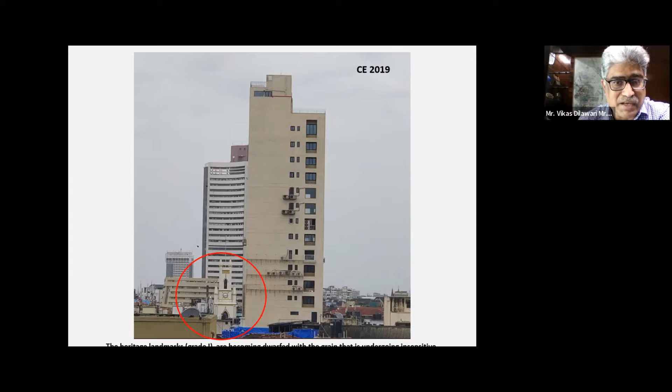Now, as we all know, Mumbai was the first city which started the heritage legislation, way back in 1992, and by '95 we had a heritage legislation. But a lot of things have changed, and you can see the skylines are also changing. What we find slightly annoying and disturbing, from a pure conservation point of view, is that grade 1 landmarks are being dwarfed by other normal buildings. Now, these are not public buildings; these are the grains which are becoming the landmarks. You can see one kind of an example, which is already there in the skyline of Fort.

And with the new DCPR rules coming in, there is an encouragement to such kind of redevelopment. And this is where conservation becomes more important and essential.

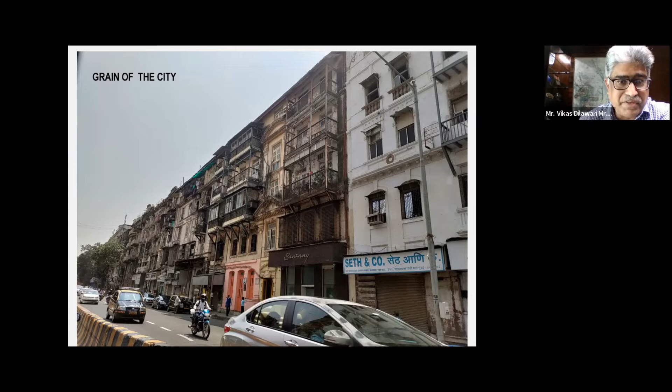Now, this is what constitutes a city, the grain of the city, and something which is not protected, which is not listed. And the only thing which is saving it is that the FSI consumed by them is more than what would be permissible. So the very fact that people keep repairing these buildings, and we still see the urban design.

As you can see, this is a photograph from Princess Street, where all the buildings are uniform in appearance, and which was a planned effort. And it's surviving very well. But unfortunately, changes have started happening. These will undergo redevelopment, and that's the concern.

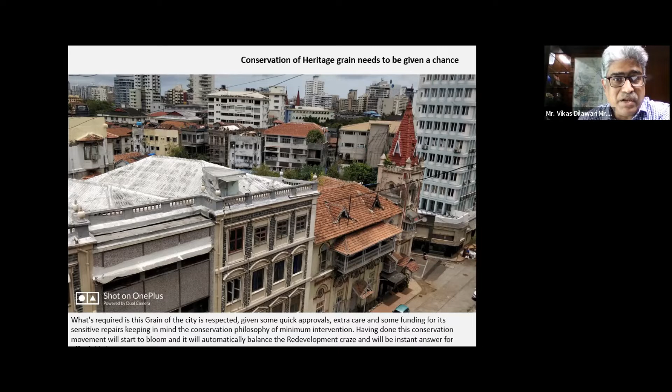Now, interestingly, this statistic is very interesting, that initially when the list was there, we had about 41 grade 1 buildings, but unfortunately these have reduced down to 10. We've added more heritage buildings and precincts, but we've also deleted some of them. The good news is we have 2 World Heritage Sites and a national park within the municipal limit.

But the unfortunate part is that these World Heritage Sites and their buffer zones, as approved by UNESCO, are not defined or marked in the new DCPR 2034. So that gives a chance and opportunity where these kinds of redevelopments can happen.

We had a review committee which has reviewed the list and has forwarded some of the revised listing of certain wards, but other wards are still pending.

Now, the thing which is of matter of concern is that the new DCPR 2034 allows grade 3 and precinct buildings to be demolished without the Heritage Committee's permission. And the new redevelopment can go as tall as 32 meters. Now, this is really the matter of concern.

And the sad part is that they have to go to the Heritage Committee only to document the heritage property which they want to pull down, which is very unfortunate.

So if you really see the percentage of the built stock which comes under heritage, it would be approximately 7.5%, as compared to London or New York, which is more than 25 to 35%. And this 7.5% constitutes real prime real estate, which is under threat.

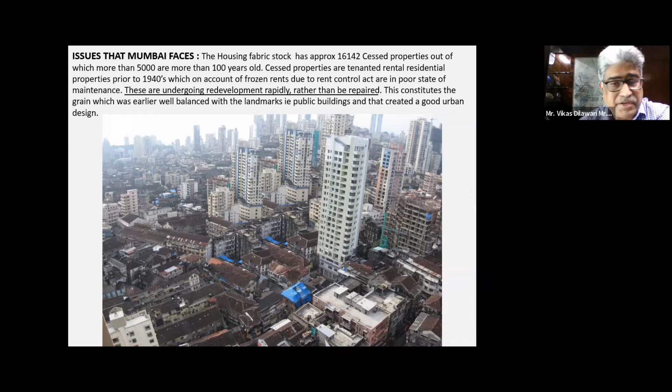Now, we are all aware that one of the major problems which we have is the Rent Control Act. And if you can see, the Rent Control Act doesn't allow the rent to be increased. So the landlord doesn't have any incentive or initiative to maintain it. Thereby, the buildings become weak and they get pulled down.

We have something called the cess board or the repair board. Now, the buildings which come under it are buildings prior to the 1940s. So if you assume the buildings to be from the 1940s, now they would be about 70 to 80 years old. And many of these are decaying and need some kind of intervention.

So if you can see, the earlier repair board used to replace the timber with timber, and later on the timber members became replaced with steel. But later on, in 1990s and '95, the whole building underwent reconstruction because, as I mentioned, the FSI they had consumed was more. But we started losing the architectural character.

But when we came down to 2000, the repair board started redoing redevelopment themselves, and they didn't find it to be very successful. So then the private builders started coming in, and you can see how the high rises and towers have started now.

So this is how slowly the grain gets eroded. What was the building height now becomes the podium, parking, and then the building goes taller than that. Having said this, the roads and the infrastructure have not really been looked into, which is a matter of concern.

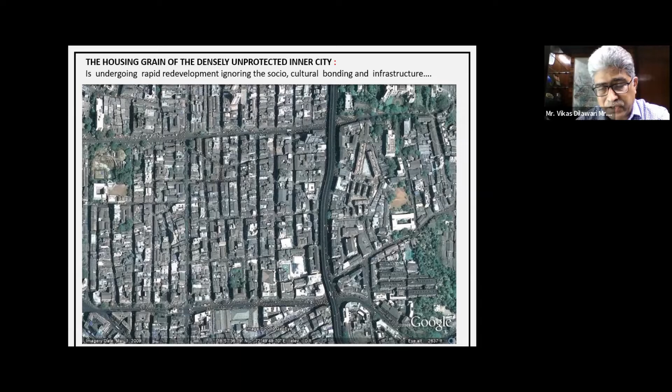This is a photograph of a normal grain. You can see the Muhammad Ali Road flyover, and this is the grain of Byculla. And you can see how these streets go from top to bottom, which is north to south, which forms the bazaar, and how this is now getting altered.

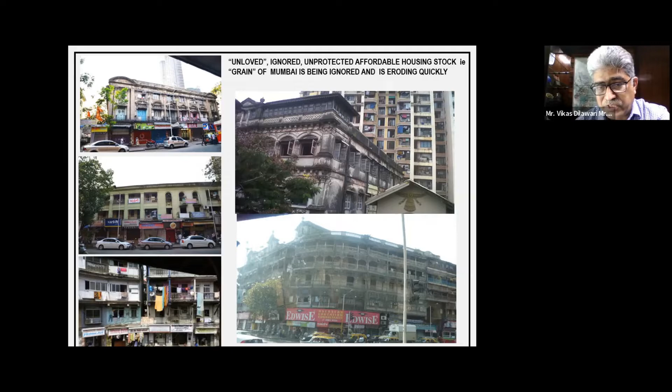You can see how the character gets, you have something which was an integral part of the character, which has now got lost. Now, it's a common fact that if you don't have good rents, the building is not going to be maintained. So there's negligence, no periodical maintenance, and increase in deterioration.

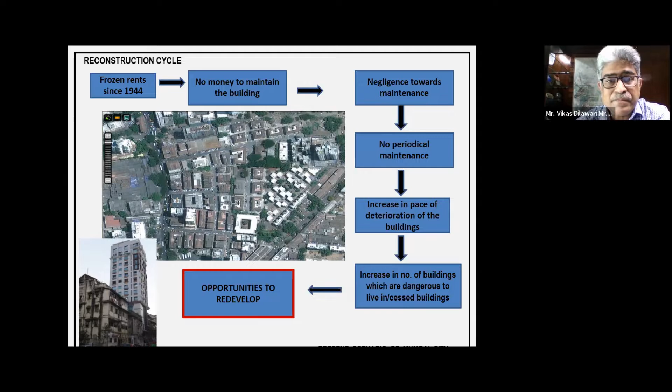Every monsoon we keep hearing a list of 200, 300 buildings coming out, which becomes unsafe. So everyone then jumps on for redeveloping it, but conservation is never given a chance or an opportunity. And that's where the conservationists have a request to the government to give an encouragement to this.

Now, these are the things which are happening, that when the buildings are pulled down, this is the kind of scale which you come on the left. What you can see is what the existing heritage building would have been. So what people try to do is they try to imitate that portion of heritage, and they construct a glass tower, which is not very justifiable because the two characters are totally different.

And these buildings keep going taller and taller. The one on the right was a chawl, which has been redeveloped opposite Bombay Central, and it's still going taller. You can still see the crane on the top.

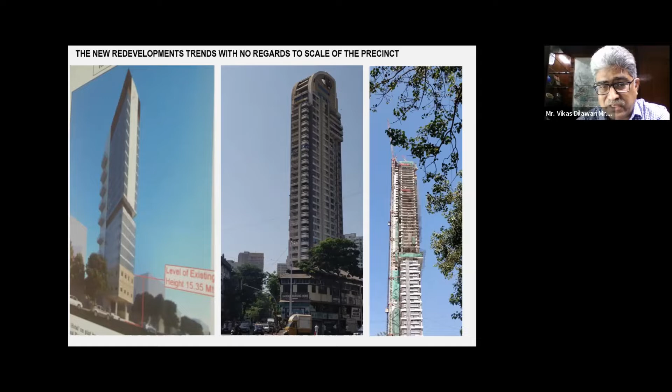Now, through some positive examples and case studies, we are trying to demonstrate how conservation can work, what are the challenges and what are the opportunities which these kind of projects give you. I start deliberately with a landmark building, and then slowly I'll go into the grain.

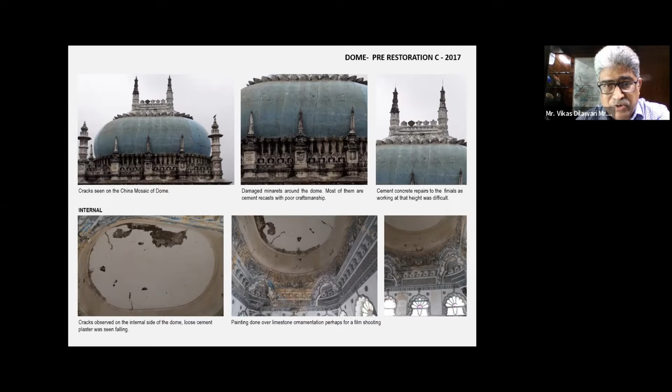This is the Mahajiani Dargah, which is from 1908. It's just about 100 years old. It was in a state of quite neglect, there were a lot of concrete additions on the minarets. The dome was leaking. You had cement concrete, which was used on the inside. The window panes were broken. And this is the overall effect.

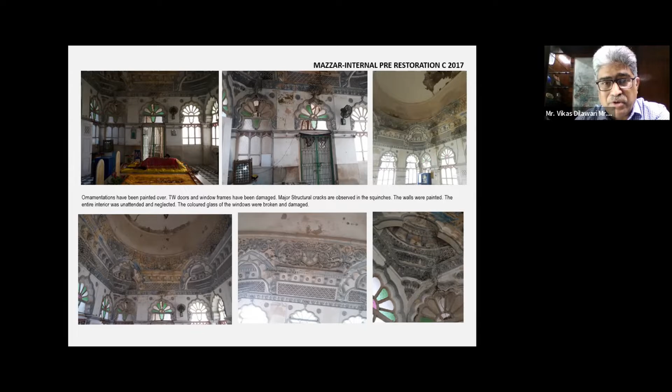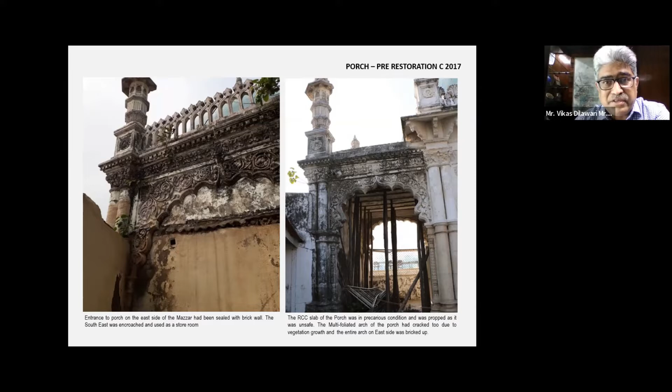Sometimes it was used for film shoots, and people painted over the stone, and this is how it looked. The broken glasses, besides the sea, they covered and protected with the help of a chadar, which was given for this. It was not a permanent solution to make it watertight. It had become dilapidated, so they had propped up certain arches, they had bricked it up, there were ad hoc additions. So this is how our heritage properties are looked after.

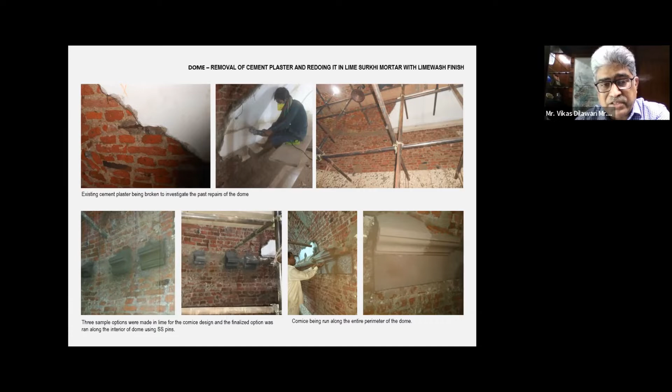But when the owners or the users decide to really conserve it, a lot of changes can happen, which is for good. And this is the first thing we started, to attend to the dome, externally and internally, and we discovered that there was a lot of cement plaster which was done. Some of the cornices were missing. So following it from a true conservation point of view, we restored it back in lime plaster, and brought the cornices back, which are the integral features of this interior space.

We had a major challenge that the stones had painted layers and layers. Now, it's not easy to remove the paint from the stone. If you scrape it, we tend to damage it because it's a soft Porbandar stone. We were fortunate that we were working on Flora Fountain, where steam was used by the conservators, and there were a lot of contractors who were trained in this process. So we reintroduced this technique of using steam.

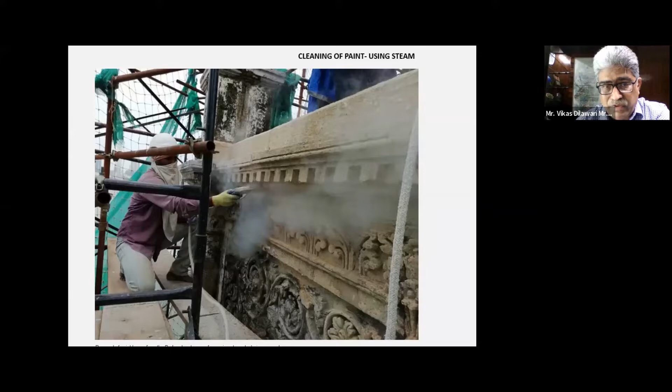Again, sometimes we are experimenting with conservation because we don't have this established. This is what we found, and what we found was to be least damaging to the stone. And very carefully this was done.

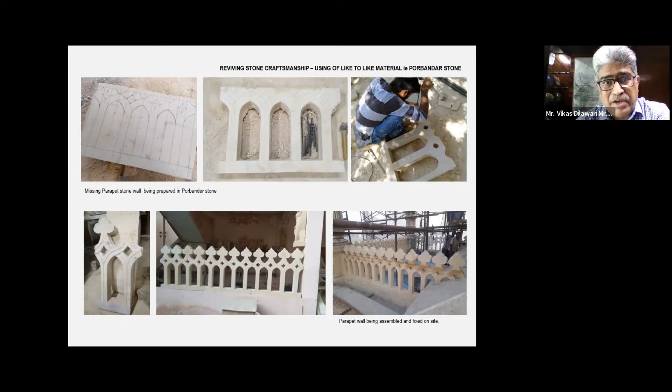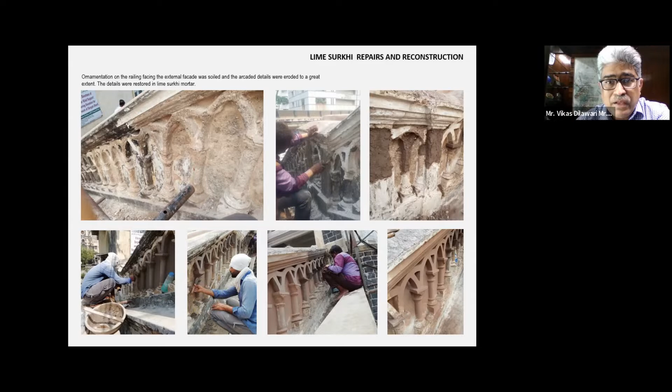Being close to the sea, the lime surkhi plaster which was there was eroded. We had to redo it, and it was done in lime surkhi again, using like-to-like materials. Similarly the woodwork, again, being a building so close to the coast, the wear and tear is fairly large. These were fixed windows which needed to be carved into these kind of special multifoil arches. So these were also revived.

And instead of using large embossed glass, we decided we'll go for some colored glass, and we tried to keep the glass plain so that when the sun sets and when the sun rises, the glass gives a different kind of effect, and it enhances the tranquility of the space inside. Having said this, as I said, I'll talk about the opportunities and the challenges of it.

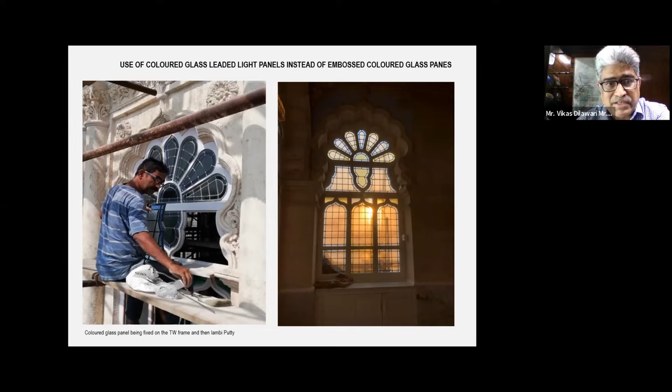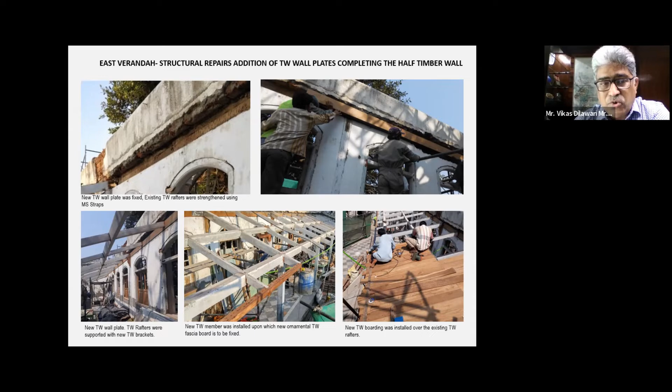We also had to structurally repair and strengthen the verandas. It's a very unique typology, not seen in Mumbai, where you have verandas and courtyards, and a very unique dome. Normally you see domes on a square, but this is an elongated dome on a rectangular plan, something like a submarine. This is the courtyard, and we had to restore its wall plates and structural system.

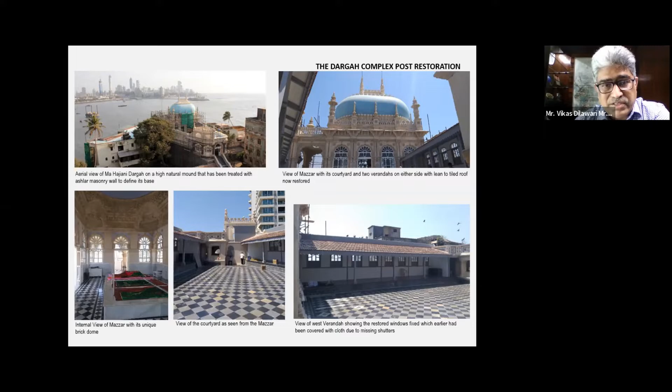You can see the entire thing when it is restored. So here, these were following the normal established conservation norms and making it functional.

But having said this, now comes the opportunities and challenges. This is a very recent photograph, and you can see some moss and algae which has come. So the question is, when you clean the paint, what do you do next? Because the users feel more comfortable painting it, but from a conservation point of view, you've decided to remove the paint and leave it like that.

Use of chemicals is again a subject of debate. Some people advocate the use of chemicals. I had applied it, but it didn't last so long. So the question is whether one should use chemicals or do periodic maintenance instead. These are some of the issues cropping up, and they need to be addressed.

It was a grade 1 building, but it was lowered to grade 2. It was neglected, and I'm sure if a review is done of the grading after it's restored, people would like to raise the grade higher, perhaps.

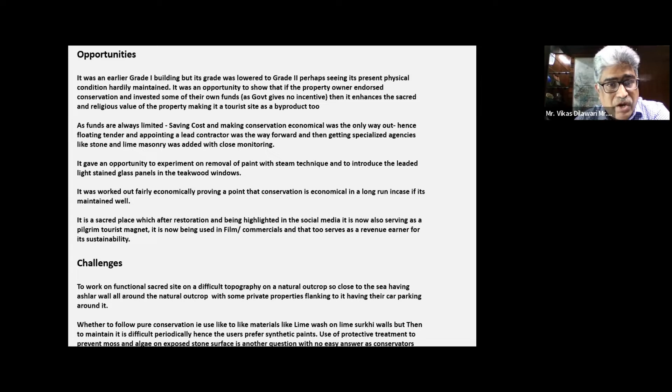As funds were limited, we had to work in the most economical manner. The difficulty was that we were working on a site which was on an outcrop. Erecting scaffolding was not easy, and the wind and rains were real challenges, because they are phenomenally strong there. We had to ensure that what we were doing was maintenance-free and would last as long as possible.

One good thing that has happened is that once this place has been restored, a lot of people have started visiting it, and it's helping pilgrim tourism, which is very important, and it's a byproduct of conservation. So these were some of the things that were there.

There's another very interesting building, personally one of my finest in Mumbai, which is Hirabag, again from 1905. All these buildings are about a century old. It was designed so that the shops would subsidize the activity of a dharamsala on the top floor. But unfortunately, with rent control, the building started getting neglected and decayed.

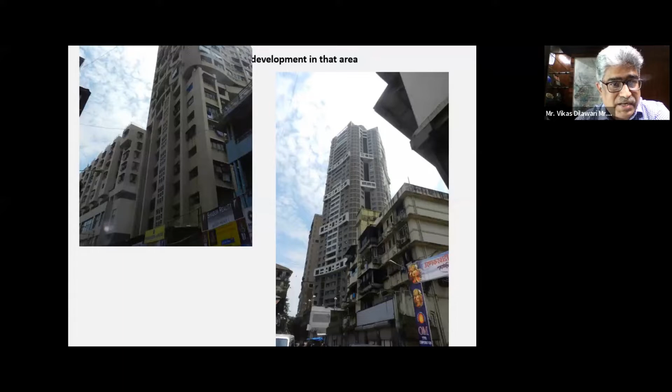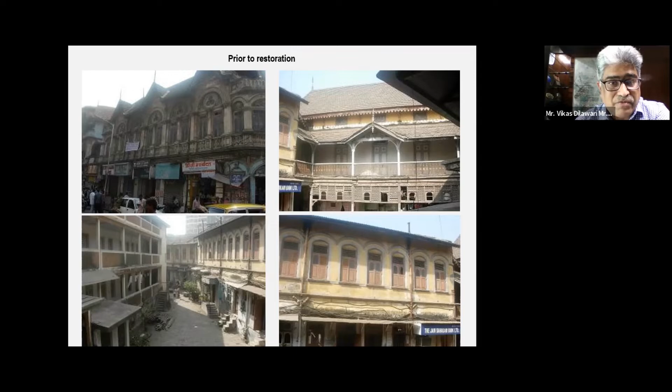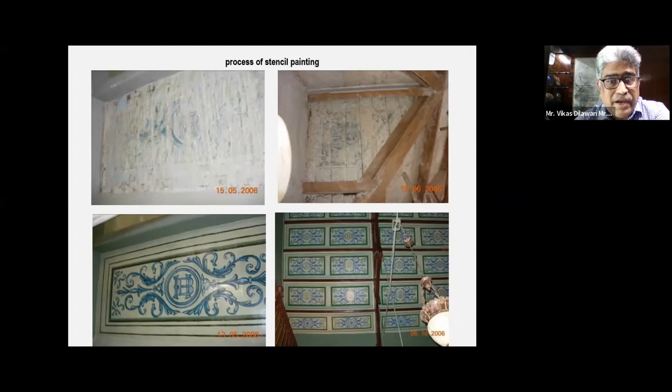While we were working on the building and trying to refurbish it, we started discovering very ornate details of stencils, something unexpected from the normal grain of the city. This is where we could help in restoring it back, and what it has done is magical.

It has now become an air conditioned space because you can't keep the windows open, the honking and noise level outside in CP Tank Bhuleshwar is very large. So the windows remain shut, and we had to air condition it. Now these halls are being used for various activities, and it started generating funds, which helps in subsidizing the dharamsalas, the basic function of this building.

So conservation can work as a tool. And of course, this was a listed grade 2 building. I started with the earlier building, which was grade 1. This is grade 2, and slowly I'll be going down to grade 3 and precinct buildings.

This is how the spaces inside look after we did one building — the clients themselves did the other building, which was very good and encouraging, that they picked up the essence of conservation and used it further. This is an example, because it is easy to pull down these kinds of spaces and go for buildings like what you see in the background, but these are the hidden jewels which bind the city and the area socially and cohesively.

So again, as I mentioned, it had to be economical. We had to see that it becomes sustainable.

And we revived a lot of lost art and craft, like gilding, stencil painting, lime arraish, lime plaster work.

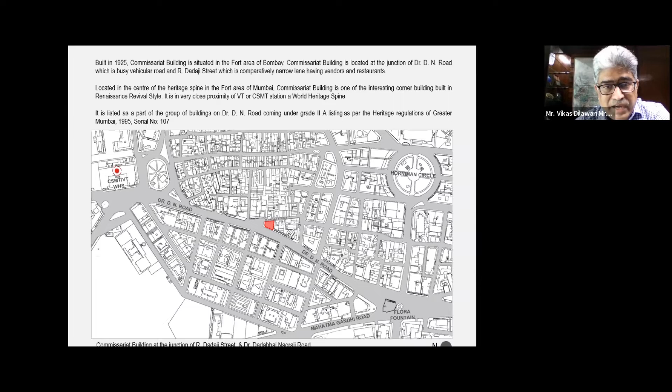DN Road is the most important road which we have. The buildings which are more significant are the ones on the western side, which came after the demolition of the fort walls. But what I'm referring to is the building shown in red, which is a 1925 building. So in 2 to 3 years time, it would be celebrating its centenary, and it has very fine urban design.

One of the buildings on DN Road has now been demolished, so we really hope nothing high rise comes in. There has been one building which has been redeveloped very sensitively in the same height and profile. Fingers crossed, but this forms a very important urban spine.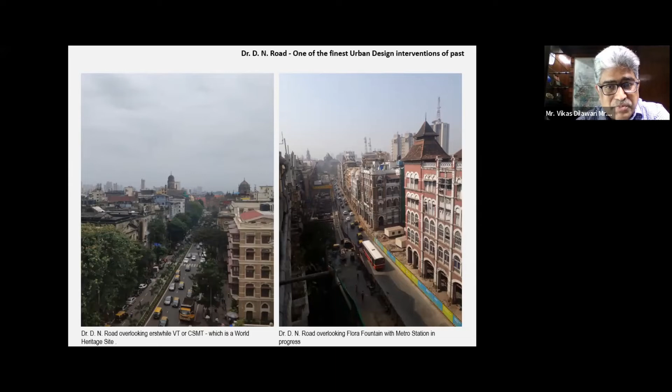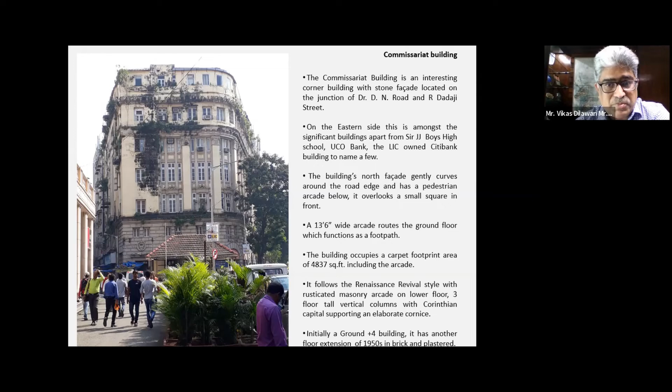This building was served a notice of being unsafe. You could have pulled it down and gone for redevelopment, but the clients, who were housed here when the building became unsafe, decided to shift out and restore this building to its original grandeur, and move back to this space. So this is how the building looked like.

It was originally a ground plus 4-story building, but post-independence, when the FSI was given higher, most of the buildings on Fort area and DN Road got an extra floor. That was integrated very sensitively without disturbing the overall ambience of the place and its urban design. So this is what it is.

And you have a metro station coming out. What you can see is the piling work happening for a station outlet.

This is how the building was neglected, and of course rent control comes into it. You had vegetation growths, areas which were inaccessible, pipes that never functioned, and on the ceiling a corrugated AC sheet roofing. You can see the beautiful two towers, VT and BMC, from behind.

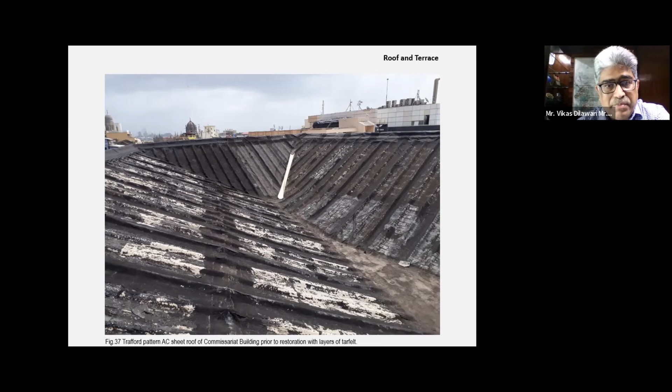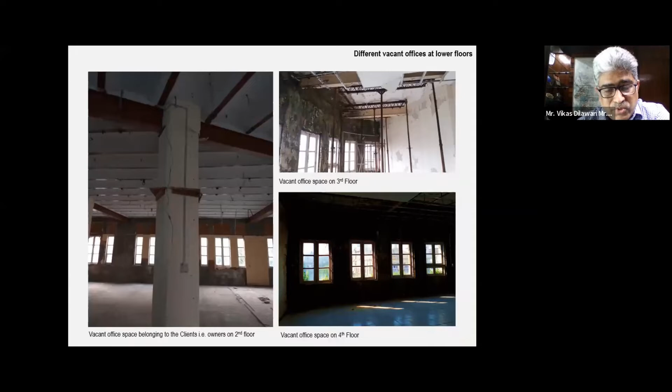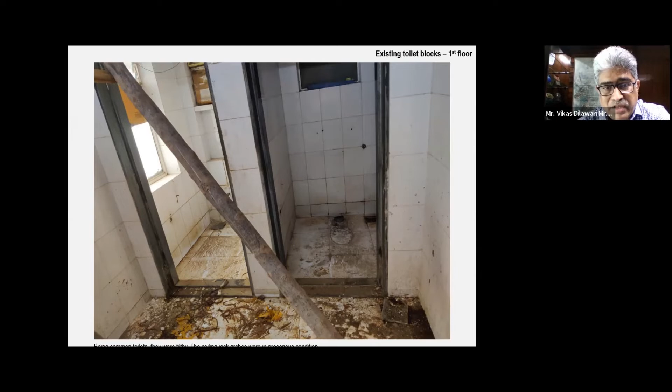When we opened the false ceiling, we discovered all the structural trusses to be completely unsafe. It had jack arches on the lower floor, which also were showing signs of distress in certain areas. It had some beautiful Minton tiles, but they were badly damaged. There was a wooden staircase, and toilets which were in complete mess, as happens with many of our buildings in Fort area, along with the electricals.

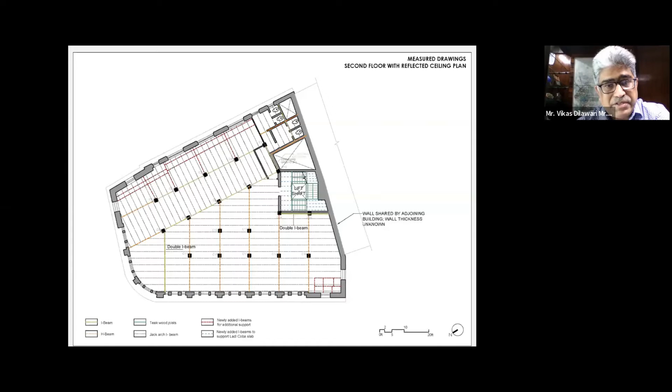So again, all these needed to be planned in a manner which was affordable, economical, and achievable. Good documentation of drawings was done. Permissions were applied to the Heritage Committee and then to the Municipal Corporation. The Heritage Committee permissions came very fast, but the Municipal Corporation's permission took very long, which becomes a deterrent — if you don't get good, quick permissions, a lot of people get stuck with repairs.

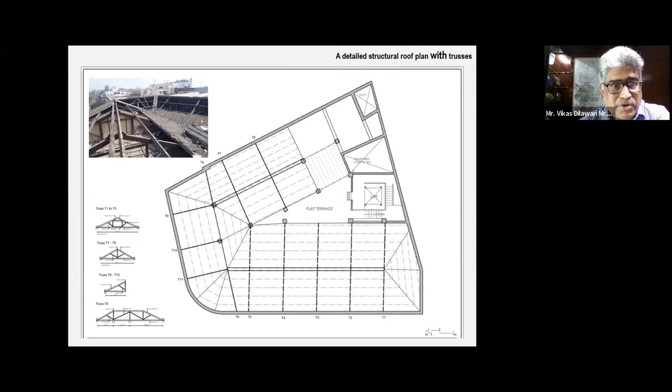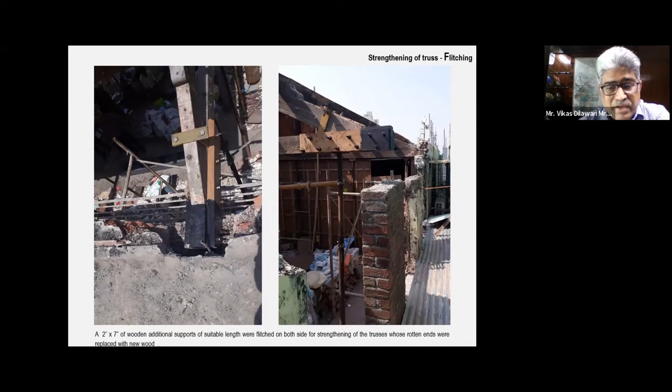This is how the process went — I'll be quick with it. The trusses were documented, the corrugated AC sheets were removed, the trusses were analyzed, repaired, and strengthened. We realized that the walls on which they were resting, which was added as an extra floor after the 1950s, was not very safe, so we had to reconstruct those walls.

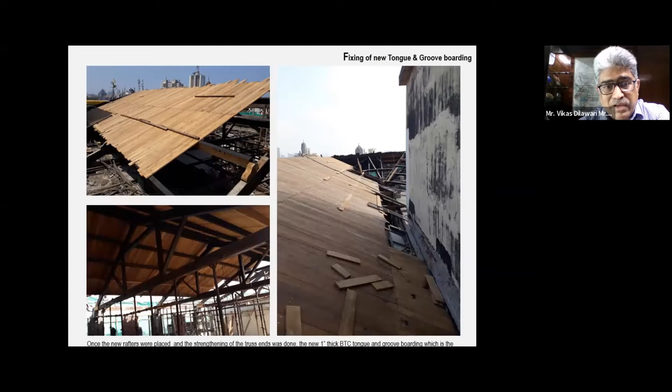The site, abutting DN Road, had roads on all sides, so there was hardly any space to keep material stacked or erect scaffolding comfortably. This is where the tiles have gone back, which blends with the character of the fort area. It also helps in thermal insulation, especially when planning to air condition. So we followed that kind of approach to go back to its original details.

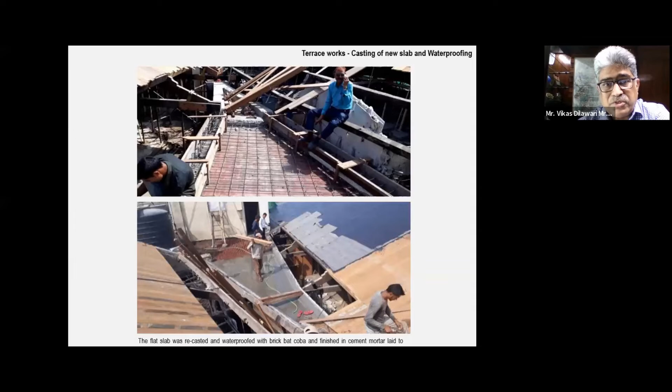These are works happening within the spaces inside, which was very tricky, as I said, because it was abutting the road. We had to introduce some new slabs, added with the help of a structural engineer. It was a great teamwork of everyone.

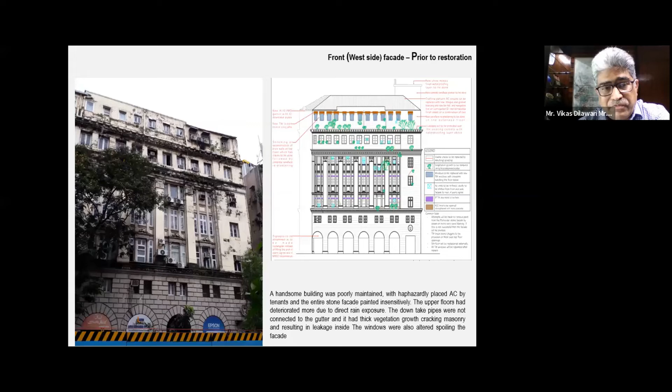The external facade was then taken up, because once you made the building watertight from the top, we started attacking the facades. The facades were facing the west side. They never had any chajjas over windows, so we gave small drip molds.

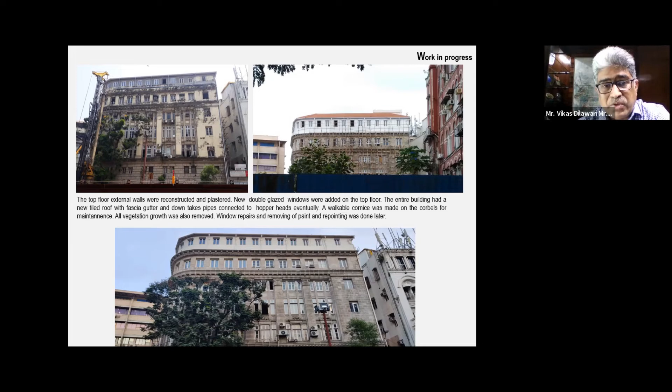The top floor, which was added later on, had internal gutters, but we shifted the gutters outside, collected the water in hopper heads and drained it off. And you can see the paint which was done on stones was removed.

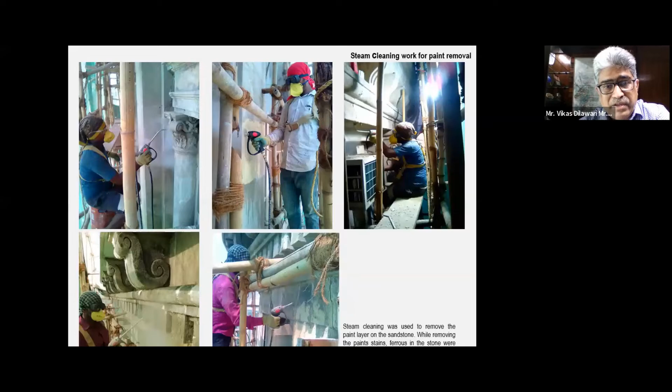This is the rear facade, and this was again documented. Again, use of steam to remove the paint in a manner which will not damage the stone. And this is how the rear facade was made.

Then we started working on floors, addressing the jack arches, because when water used to come in from the west side windows, the first two or three arches were very badly damaged. Not all the arches were damaged, but certain ones were. So again, using the conservation philosophy of minimum intervention, we did what was desirable and improved the technique.

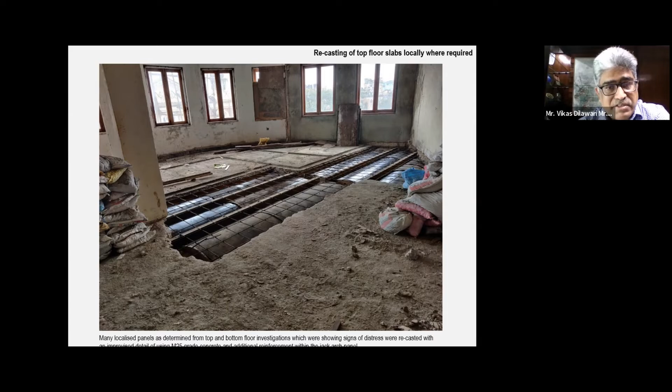A mesh of reinforcement has been added as an extra protection, and that binds it. The same technology of jack arches was continued, and in certain areas we put a mesh which binds the whole floor together, as advised by the structural engineer. Now you have a very large space available for adaptive reuse.

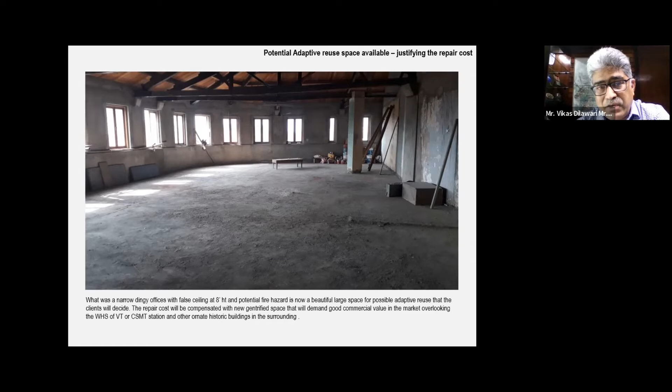Now, this is where the clients will move in, who are the owners of the building. So they have plowed the money back in to have the building restored, and that has enhanced the property value.

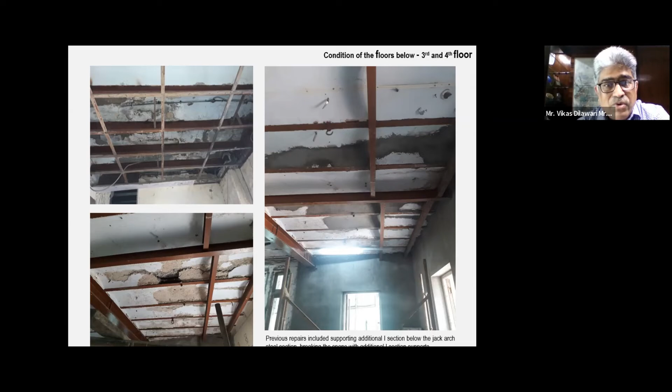Now, other work was done on the floors below. These are tenanted properties, and when you're working on such properties, the tenants don't shift. So people keep repairing it as best they can from inside—one steel joist, another—and then put up a false ceiling. This is how we got an opportunity to convince some of them to vacate their offices for a few months.

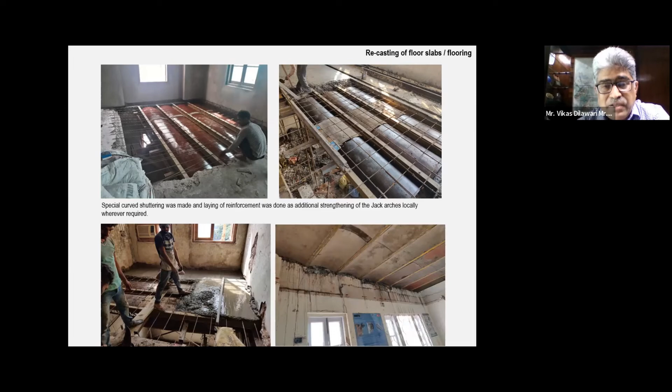We cast new slabs, and you can see the condition—it was highly precarious. Again, following the same conservation techniques of using like-to-like materials, we reintroduced jack arches and discouraged use of false ceilings, so that the structural system of the building is exposed.

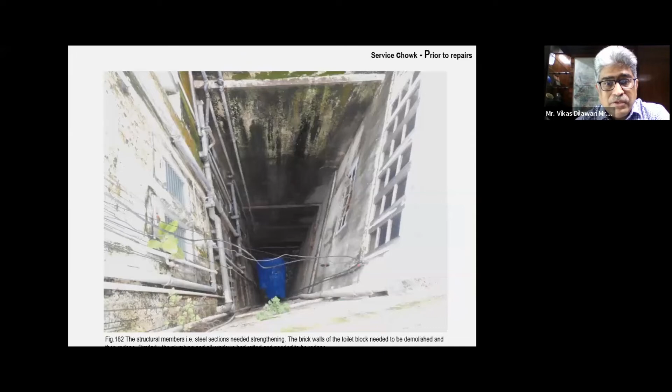So very quickly, this is just to show you a typical Fort area building, but once you treat it properly, it starts transforming and you increase its property value. The best thing is that the footprint remains the same, the people remain the same, and you're not loading the fragile infrastructure.

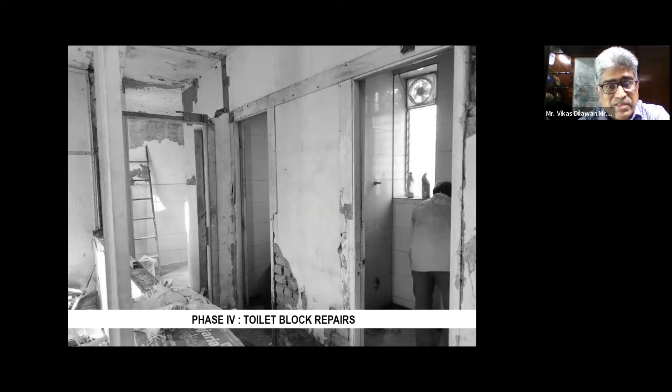The toilets were certainly the most precarious area. So we cast new slabs with sunk slabs for waterproofing details to happen.

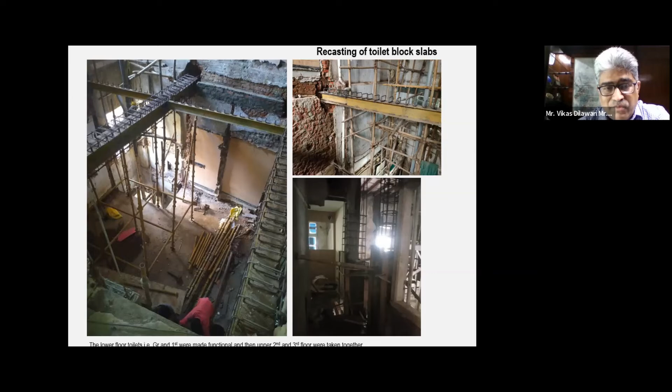And of course, COVID also happened at this same time, and the importance of good hygiene and other things was realized, which endorsed what we were doing.

Electrical forms a very important component, so all this needed to be planned in a very integral manner—one thing at one time. Of course, the lockdown gave an opportunity, because most of the offices were closed, so we could work on the electricals and redo them.

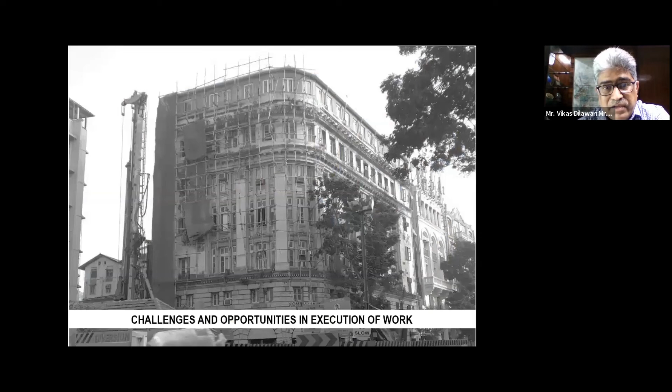Now, as I mentioned, there are many challenges, because when you're working on a very tight site where you can't unload material, where do you keep it? How do you work? These are a few things one has to learn in project management, how to handle it.

The other thing was that suddenly the metro started coming in, so where we used to unload a truck, that also stopped—they cordoned off that area too. For this, the permissions, as I mentioned, the municipal permissions take a long time, and it's online, and sometimes you have to wait for a very long time, which is really not very desirable.

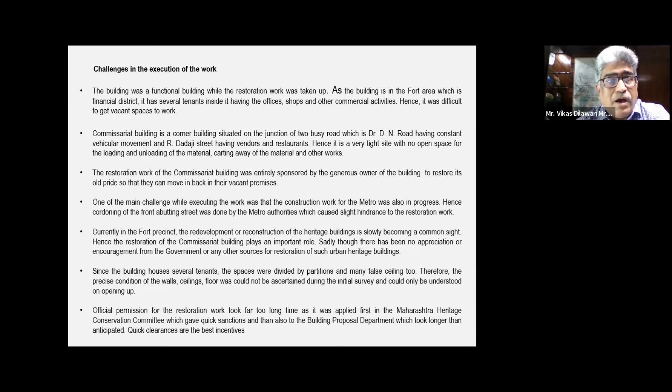The opportunities were several—you were given a free hand to do what you wanted, and with the cooperation of the tenants, who didn't contribute anything, we managed to do a lot of work. It was minimum intervention, using like-to-like material, and doing an economical repair so that other buildings can follow the same kind of path further.

The property now commands good property value. They have an entire second floor which is being leased out, and hopefully with the lease rent they should be able to maintain the building. So this is how conservation can be used to restore the grain.

And these grains don't need to then become landmarks, and the established pattern of our city, which was the finest city east of Suez, can be retained.

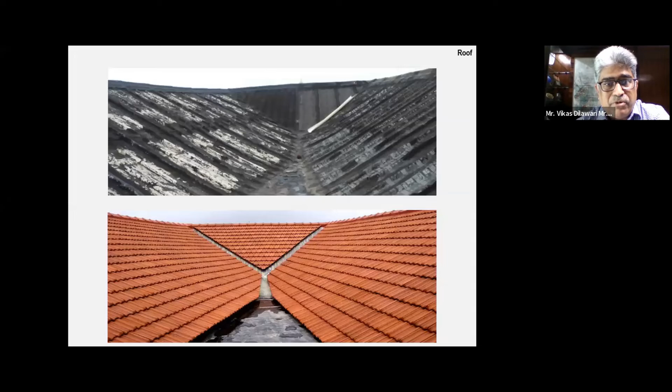So these are just very quick before-after photographs for you to see the difference it brings. Of course, it's a very slow, tedious process of 2 to 3 years. It can't happen overnight. A lot of personal attention and intervention is required. And this is the difference which it brings. This is the top floor, and this is the view you get from the top of the terrace now.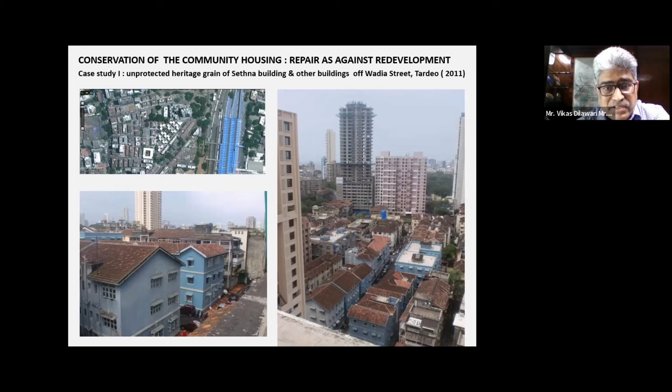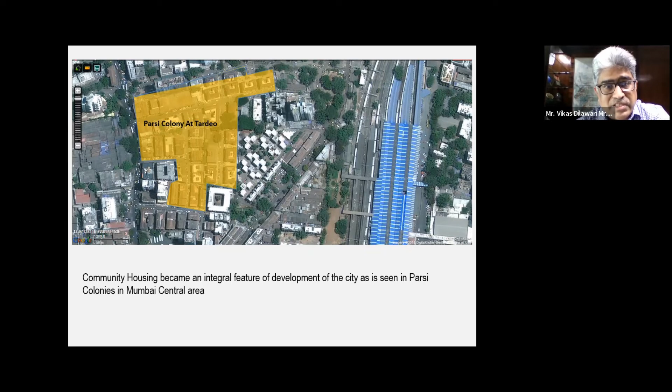Now, coming to the real residential grain, I was fortunate that I got a chance to work with Garib Zarthoshti Rahethan Fund, a charity which deals with the housing of poor Parsis. And this is interesting: in the 19th century, community housing was an integral feature of development of a city. These are very evidently seen in Parsi colonies, which we have several of, of different scales and typologies. This is the one located in Tardeo.

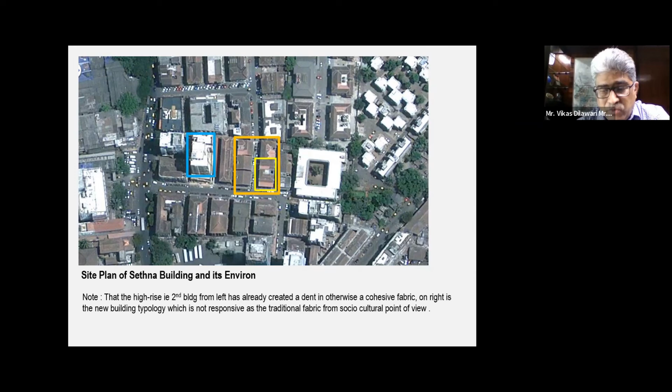And these are the buildings which are there. You can see from the one mentioned in blue, the one who decided to go high rise is disturbing the entire pattern. The 5 buildings which we worked on were not listed, they were just simple buildings. And once you have conserved it, it's given a new kind of lease to them, and it also gives a respect that they can come under heritage character if a revised listing is done there.

Housing has remained a most important component right since Mumbai's 19th century development, and the City Improvement Trust, Bombay Municipal Corporation, all catered to and monitored the growing needs of the city. The Chawls became an affordable single unit housing which served both economical and social needs, and they were developed both by private parties and by the state respectively, and were an accepted typology for development. Though accommodation of space was limited and affordable, it kept a good socio-cultural interaction, which was designed keeping in mind the climatic consideration. Now that's the very important component on the point which I want to highlight.

These are the buildings which, in case these get pulled down, you get these kinds of high rises and this kind of new typology which comes in.

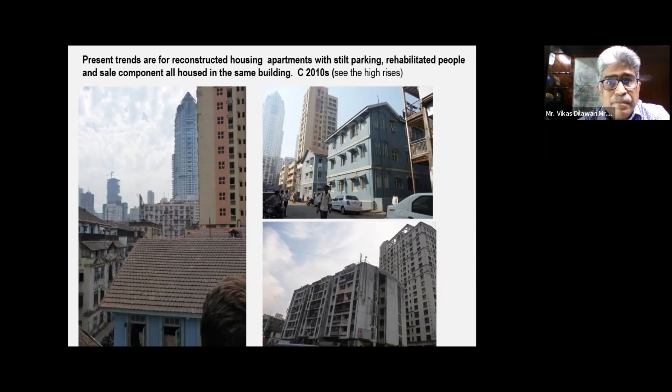So these are the 5 buildings which we started with. We started working on this first one on the right, which is the Sethna building. We did the structural repairs. This is how the facade was, very normal, simple, discrete buildings. A lot of vegetation growth, a lot of complete neglect. A lot of people had added a lot of things. There were problems in certain areas of the slabs.

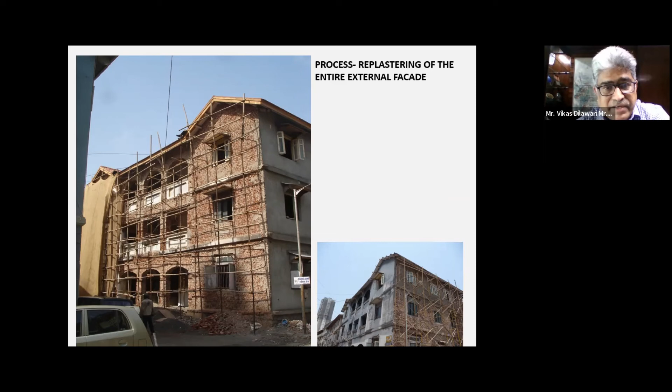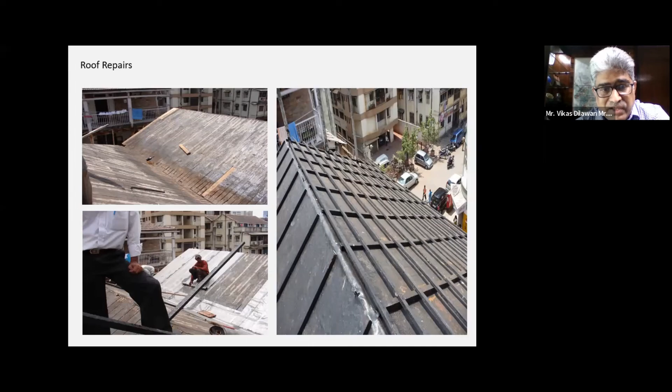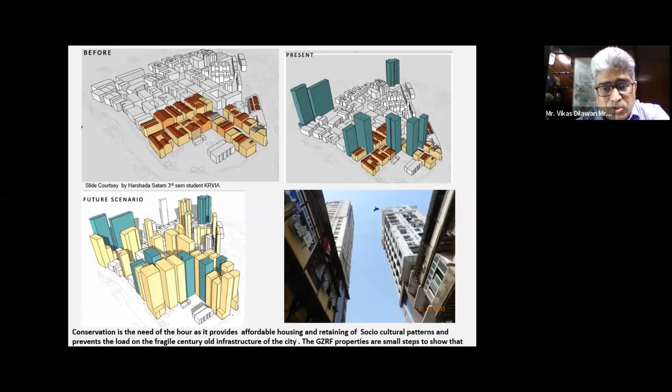And if you don't conserve these, you're going to get something as what you see in the bottom left slides. This is what is going to happen to the entire city. So the choices are very clear that these are not the kind of desirable things which we want to go for. Hence conservation or repair of these old properties is something which should be done because it provides affordable housing, retains the socio-cultural pattern, and doesn't load the fragile infrastructure of the city.

This is another example of another housing colony, which is not located very far from there, Mumbai Central, opposite Nair Hospital.

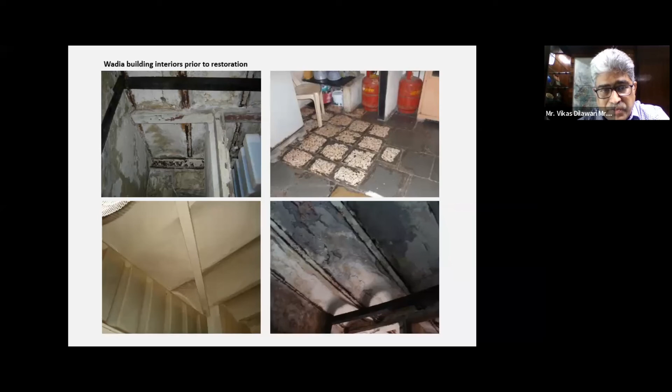Everyone thinks adding steel and steel we can keep prolonging the life, but it's not real because no one wants to vacate the building. So we were fortunate that we decided one half of the building to be completely made vacant, and we shifted the people to areas where the trust had available space, and we could work on these things.

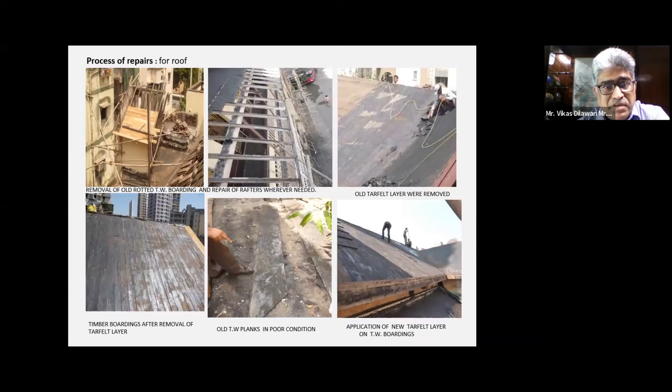Everyone had done some ad hoc changes, so all this was streamlined. The first thing, as I mentioned, always starts with the roof work. The most important thing is to make the building watertight, to repair all the roofs.

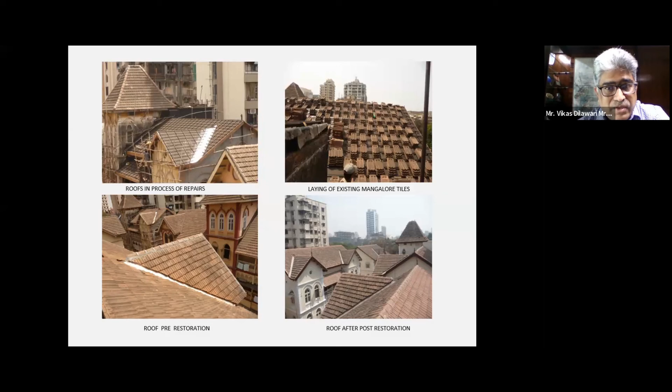Mangalore tile roof work will become obsolete in a couple of years because we are fast losing this kind of traditional art. You can see the condition of these structural members, which were completely dilapidated. It was a miracle that some of these were surviving.

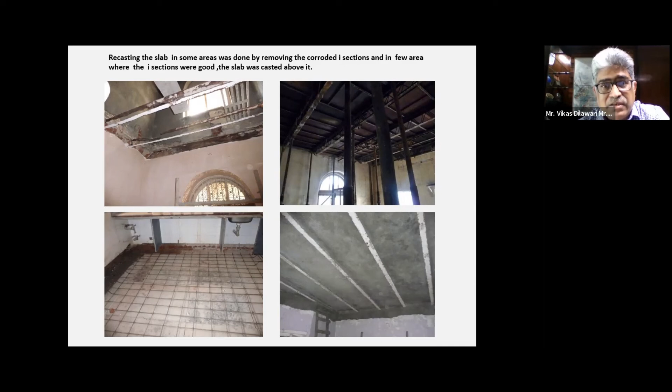So using whatever was good, we cast slabs. Sometimes we cast one flat slab, sometimes we used the same I-sections, and whatever was economical and faster, that was the technique which was used.

We upgraded the toilets and other facilities, and the lost details of the buildings were put back. Following the conservation norms of using minimum intervention, we could manage to restore these buildings back to their original grandeur.

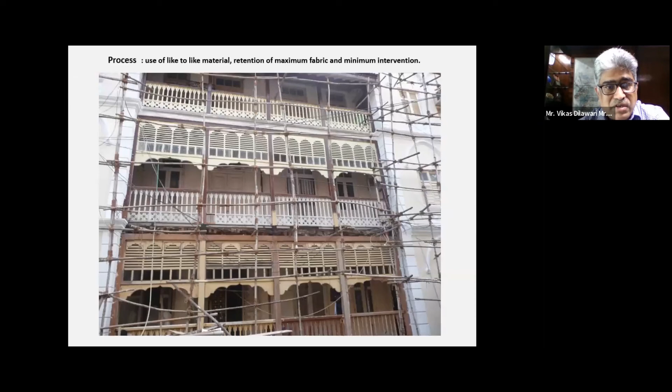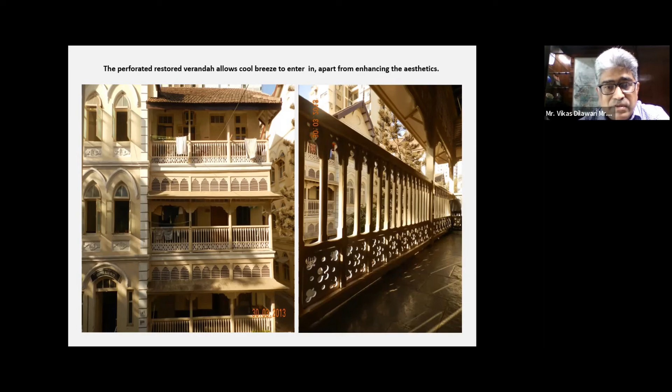Now, these were all done in 2012. It's been more than 10 years now. You can see the details of these buildings coming back, the box grills being removed. Just imagine how buildings which we consider neglected and want to pull down, if you restore them, become the same buildings that are a delight to photograph, like this particular one.

Now, the misconception is that conservation is expensive, which is not the case compared to redevelopment, where you go into a lot of 3,000 to 4,000 rupees, apart from resources and apart from loading the infrastructure. Here, we did several interventions in all 5 buildings, and our cost ranged around 860 rupees.

I'm talking of 2009 to 2012, for a complete restoration including the structural portion of the building. In some buildings we did the common areas, the exteriors and the roof, which cost about 414 rupees. In certain areas we just did the roof and the facade, which cost us 330.

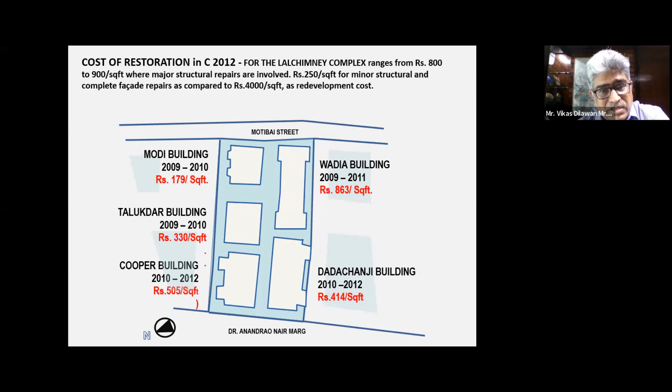For the Modi building, it was just the painting outside and repairing the facade, so that was 200. So it's a misconception that conservation is expensive. It works out very economical, and once it's been done, you have to take care of it with periodical maintenance, which is important.

To end up, I would just try to come to when I was practicing conservation, history was a very important component, and authenticity and other things. But now I'm seeing conservation in a different light. A simple thing is that if today's architecture cannot be tomorrow's heritage, then it's a good reason why we should encourage conservation.

What we really see is something which doesn't have good urban design, doesn't have value which will last you so long. What we find very surprising is urban renewal and regeneration is never given a chance. The whole focus seems to be on redevelopment, and in redevelopment, scale, density, and land use should be controlled to match the character of the place.

Because what we try to do is follow a common bylaw system, but at least for these heritage areas, we should have stricter guidelines for grade 1, grade 2, and grade 3, and for precincts. Ideally, if the buildings are good, these should not be touched or pulled down, we should reuse them.

Now, something important which I've learned in 30 years of practice is that change is an inevitable part of nature, but change for the need will always integrate and blend. Change for the greed is what creates the conflict, and this is what you see in the city.